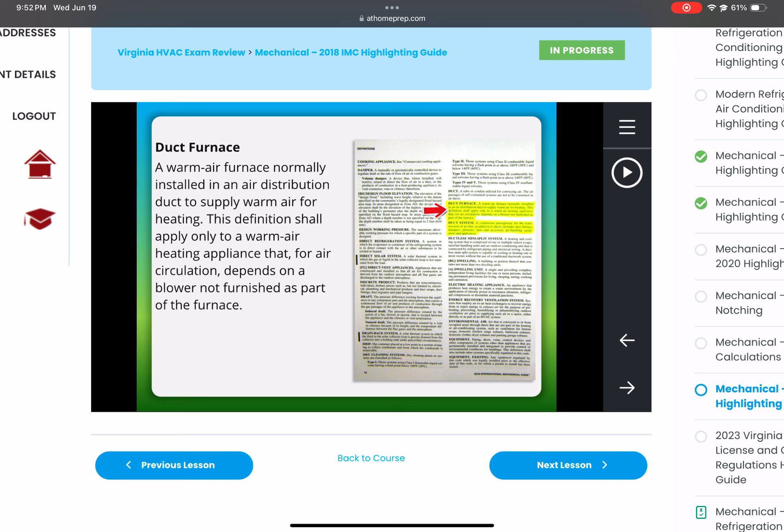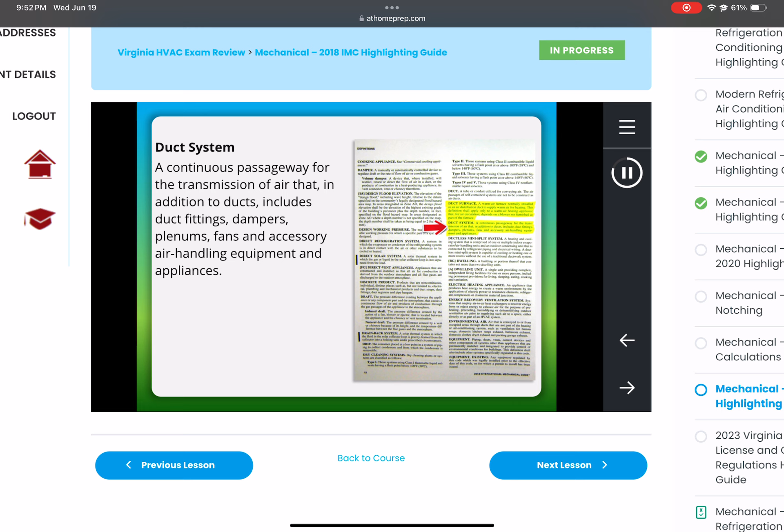Duct system. A continuous passageway for the transmission of air that, in addition to ducts, includes duct fittings, dampers, plenums, fans and accessory air handling equipment and appliances. Low-pressure hot water heating boiler. A boiler furnishing hot water at pressures not exceeding 160 psi and at temperatures not exceeding 250 degrees Fahrenheit.

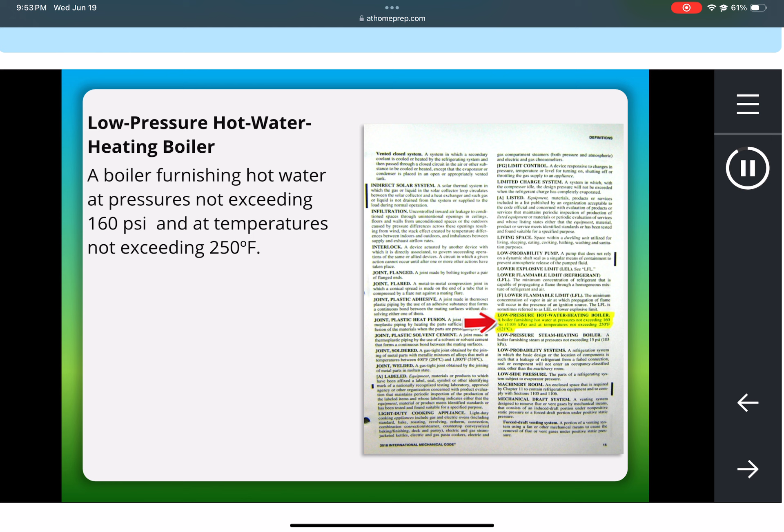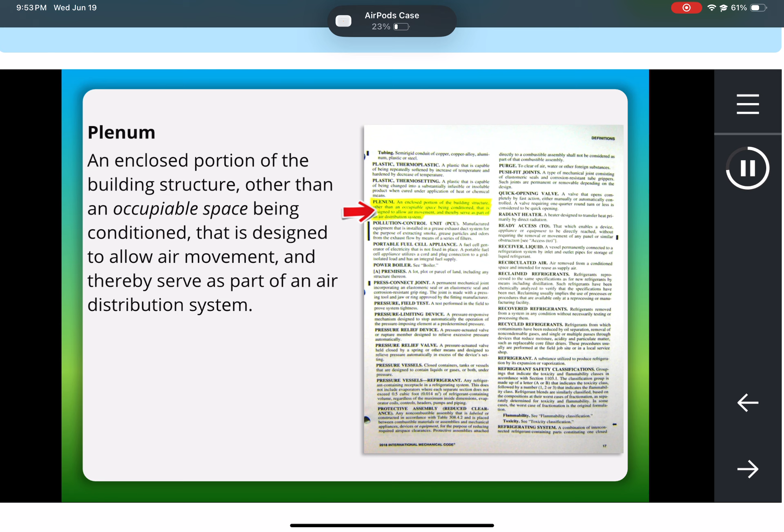Plenum. An enclosed portion of the building structure, other than an occupiable space being conditioned, that is designed to allow air movement, and thereby serve as part of an air distribution system.

Joist notching. Holes bored in joists shall not be within 2 inches of the top or bottom of the joist, and the diameter of any such hole shall not exceed 1/3 the depth of the joist. Notches in the top or bottom of joists shall not exceed 1/6 the depth, and shall not be located in the middle third of the span.

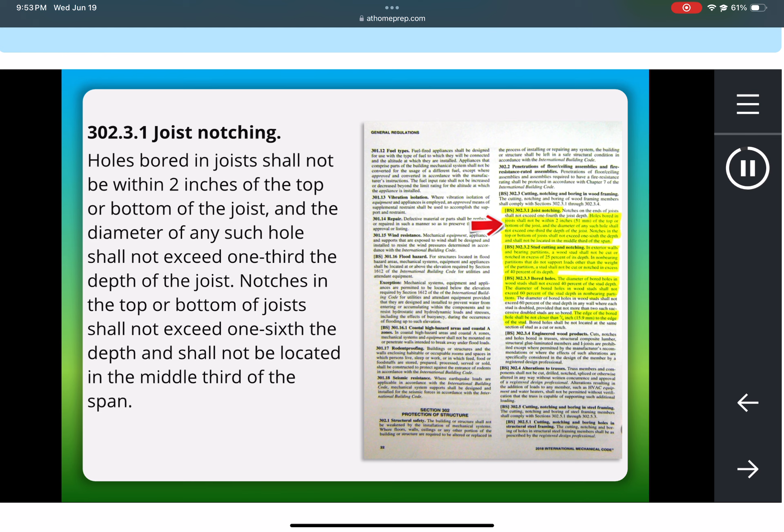Stud cutting and notching. In exterior walls and bearing partitions, any wood stud shall not be cut or notched in excess of 25% of its depth. In non-bearing partitions, that do not support loads other than the weight of the partition, a stud shall not be cut or notched in excess of 40% of its depth.

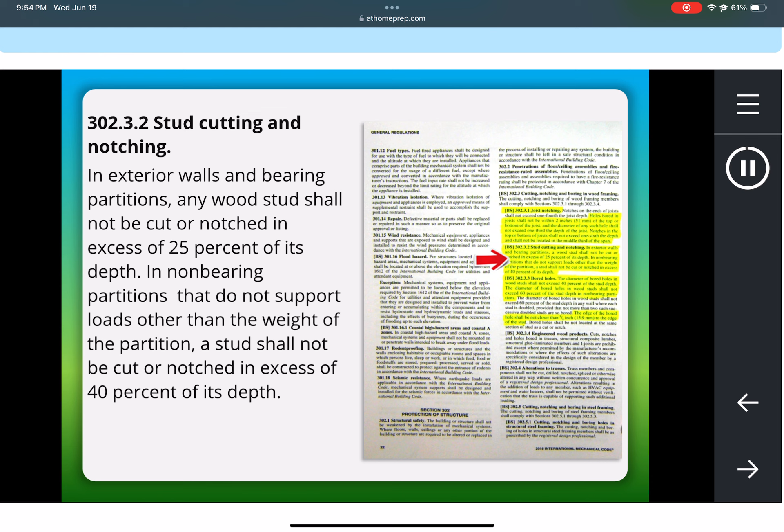Bored holes. The diameter of bored holes in wood stud shall not exceed 40% of the stud's depth. The diameter of bored holes in wood stud shall not exceed 60% of the stud depth in non-bearing partitions. The edge of the bored hole shall be not closer than 5/8 inch to the edge of the stud.

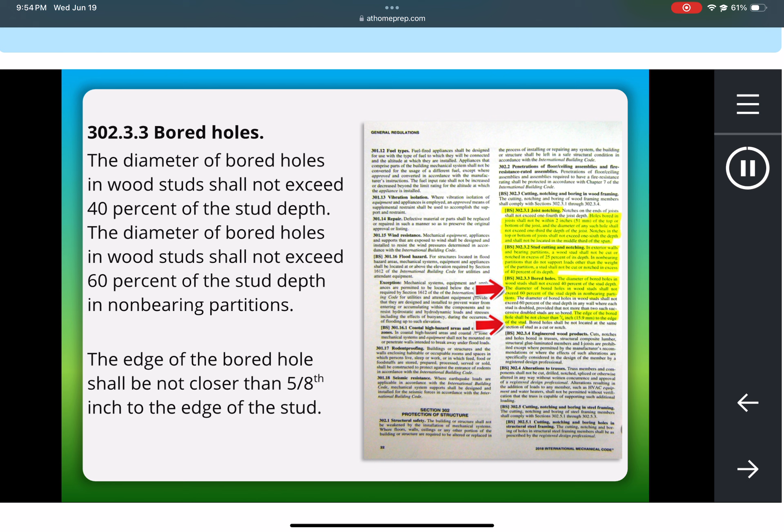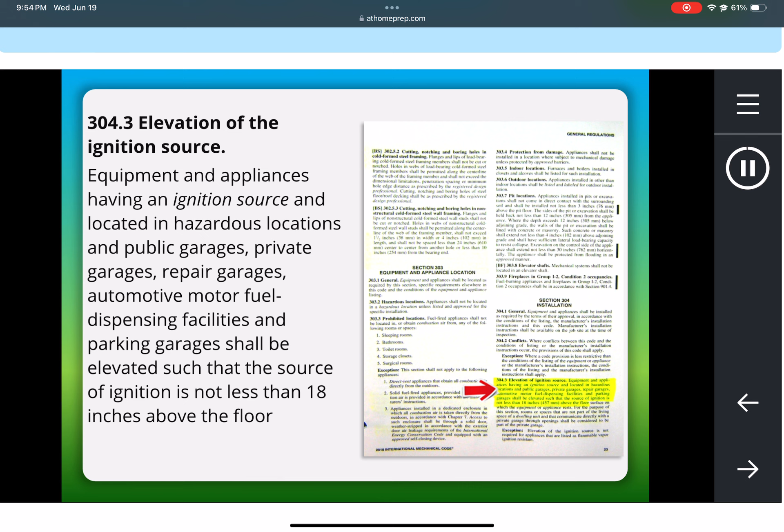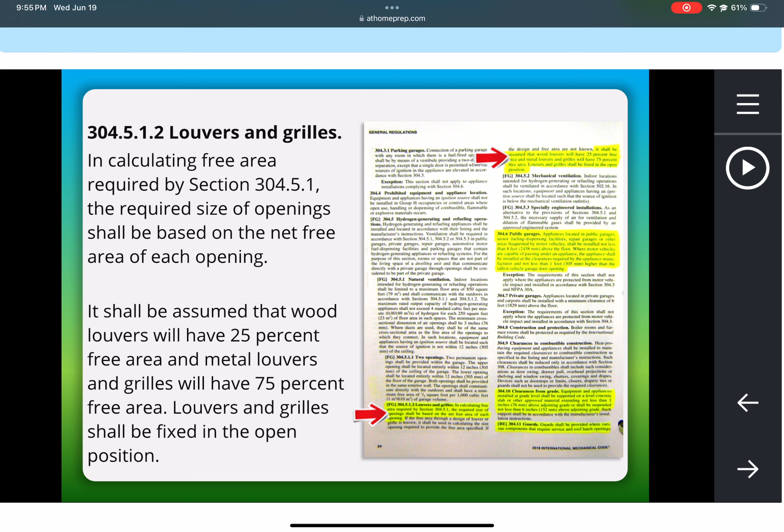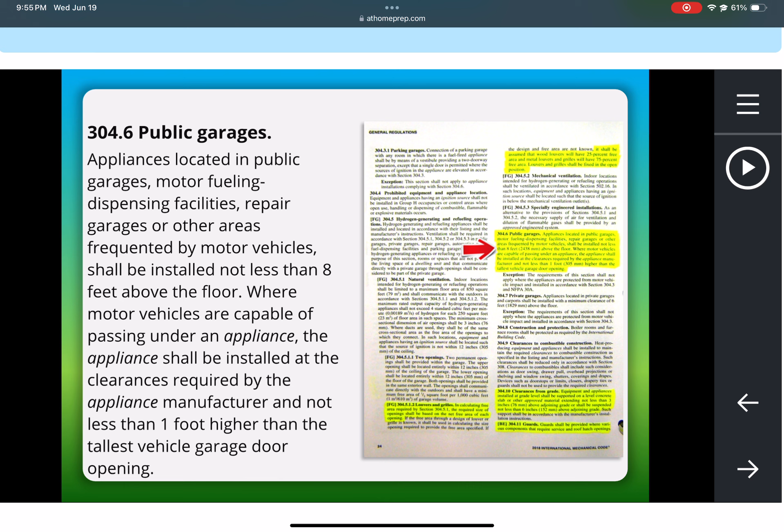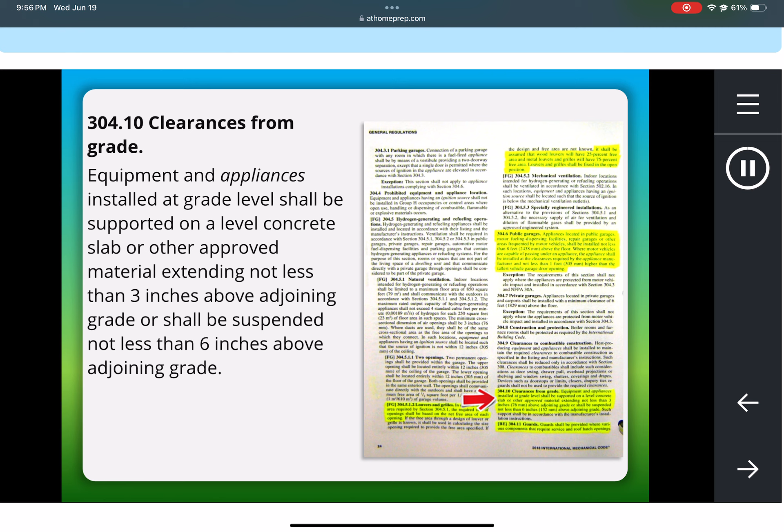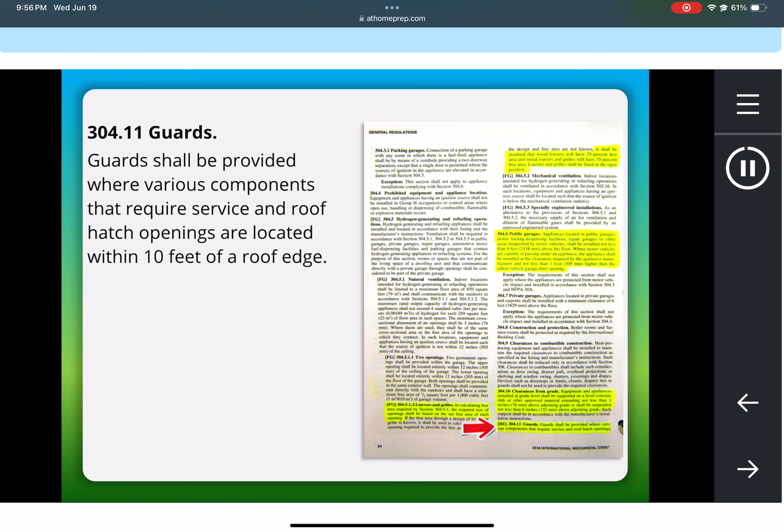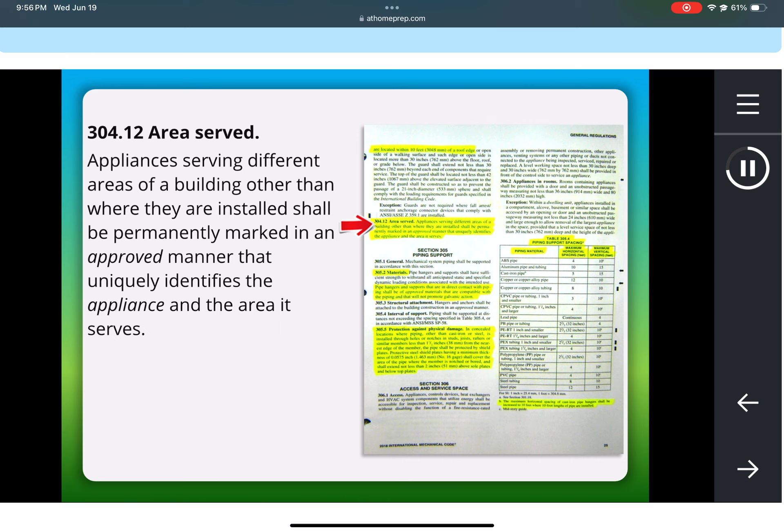Guards. Guards shall be provided where various components that require service and roof hatch openings are located within 10 feet of a roof edge. Area served. Appliances serving different areas of a building other than where they are installed shall be permanently marked in an approved manner that uniquely identifies the appliance and the area it serves.

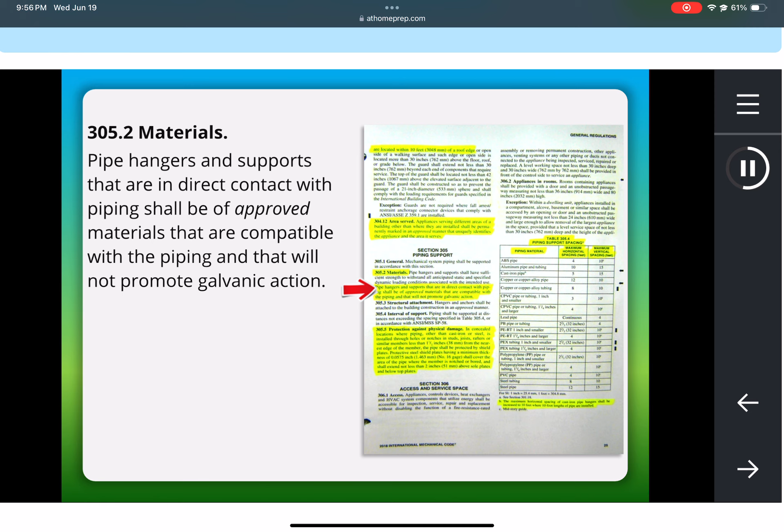Materials. Pipe hangers and supports that are in direct contact with piping shall be of approved materials that are compatible with the piping and that will not promote galvanic action.

Protection against physical damage. In concealed locations where piping, other than cast iron or steel, is installed through holes or notches in studs, joists, rafters or similar members less than 1 1/2 inches from the nearest edge of the member, the pipe shall be protected by shield plates. Protective steel shield plates having a minimum thickness of 0.0575 inch, number 16 gauge, shall cover the area of the pipe where the member is notched or bored, and shall extend not less than 2 inches above sole plates and below top plates.

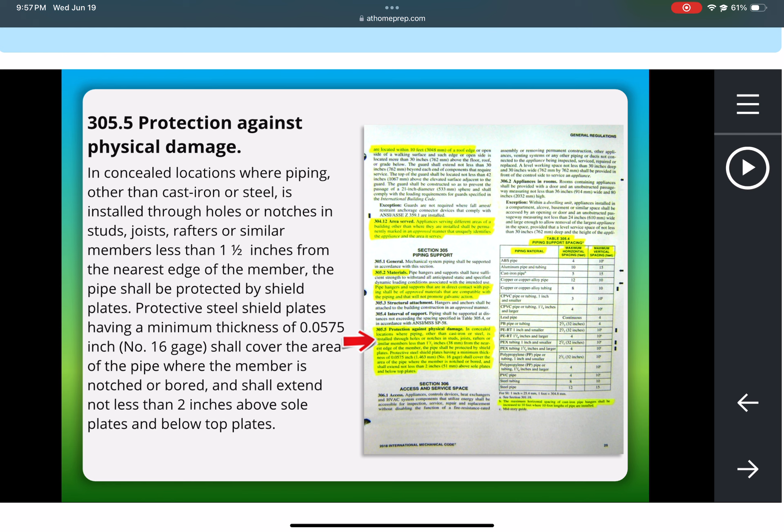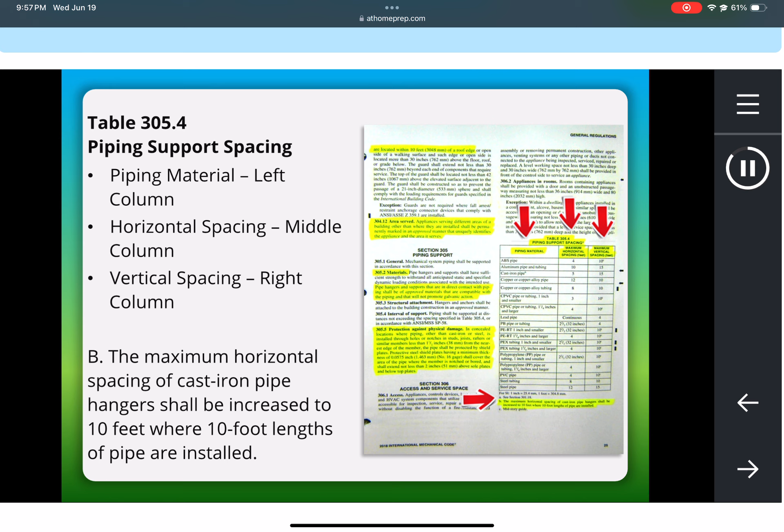Table 305.4, Piping support spacing. For this table, piping material is listed on the left, while the maximum horizontal spacing is in the middle column and the maximum vertical spacing is on the right. Pay close attention to Note B. Note B indicates that if cast iron pipe hangers are installed in 10-foot lengths, the maximum horizontal spacing between hangers can be increased to 10 feet.

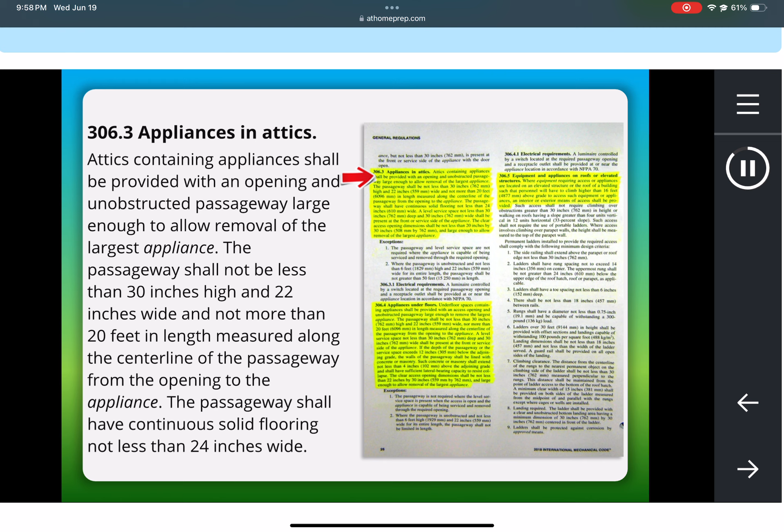Appliances in attics. Attics containing appliances shall be provided with an opening and unobstructed passageway large enough to allow removal of the largest appliance. The passageway shall not be less than 30 inches high and 22 inches wide and not more than 20 feet in length measured along the center line of the passageway from the opening to the appliance. The passageway shall have continuous solid flooring not less than 24 inches wide.

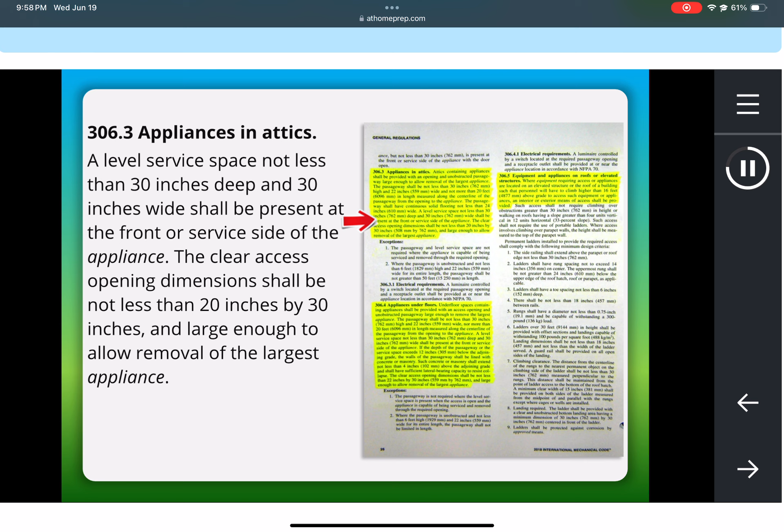A level service space not less than 30 inches deep and 30 inches wide shall be present at the front or service side of the appliance. The clear access opening dimensions shall be not less than 20 inches by 30 inches, and large enough to allow removal of the largest appliance.

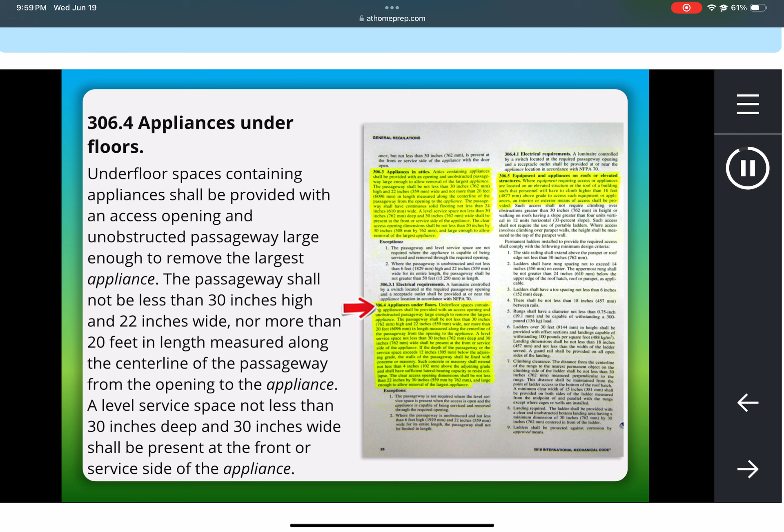Appliances under floors. Underfloor spaces containing appliances shall be provided with an access opening and unobstructed passageway large enough to remove the largest appliance. The passageway shall not be less than 30 inches high and 22 inches wide, nor more than 20 feet in length measured along the center line of the passageway from the opening to the appliance. A level service space not less than 30 inches deep and 30 inches wide shall be present at the front or service side of the appliance.

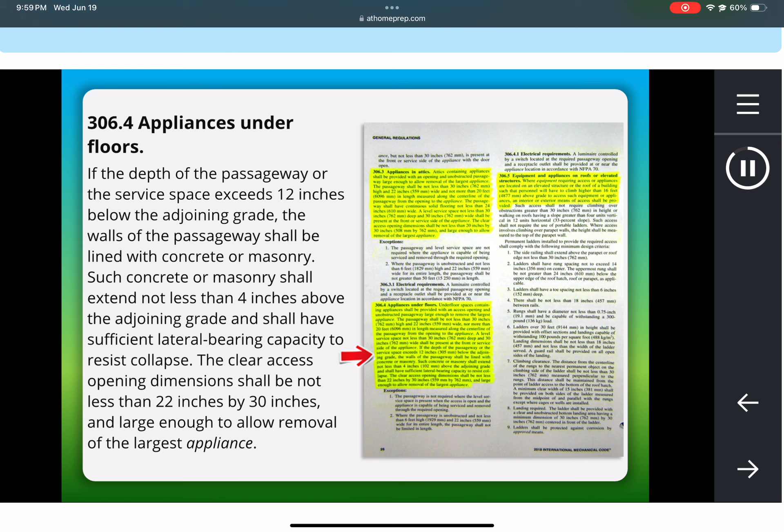If the depth of the passageway or the service space exceeds 12 inches below the adjoining grade, the walls of the passageway shall be lined with concrete or masonry. Such concrete or masonry shall extend not less than 4 inches above the adjoining grade, and shall have sufficient lateral bearing capacity to resist collapse. The clear access opening dimensions shall be not less than 22 inches by 30 inches, and large enough to allow removal of the largest appliance.

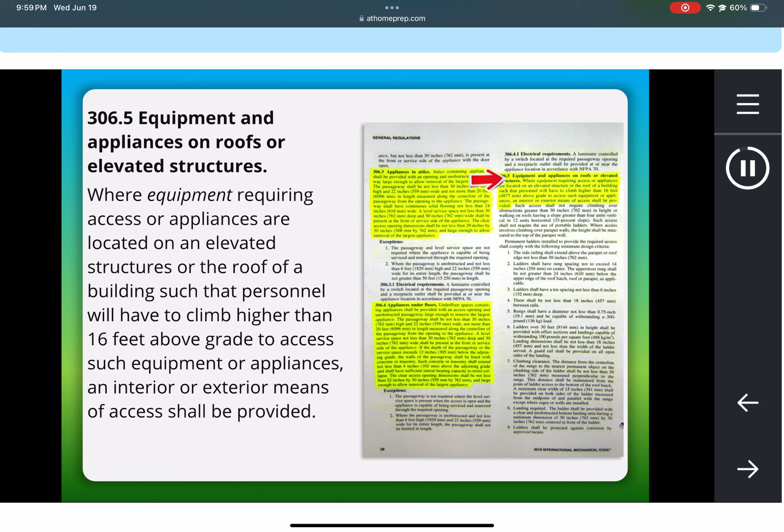Equipment and appliances on roofs or elevated structures. Where equipment requiring access or appliances are located on an elevated structure or the roof of a building such that personnel will have to climb higher than 16 feet above grade to access such equipment or appliances, an interior or exterior means of access shall be provided. Condensate disposal. Condensate shall not discharge into a street, alley or other areas so as to cause a nuisance.

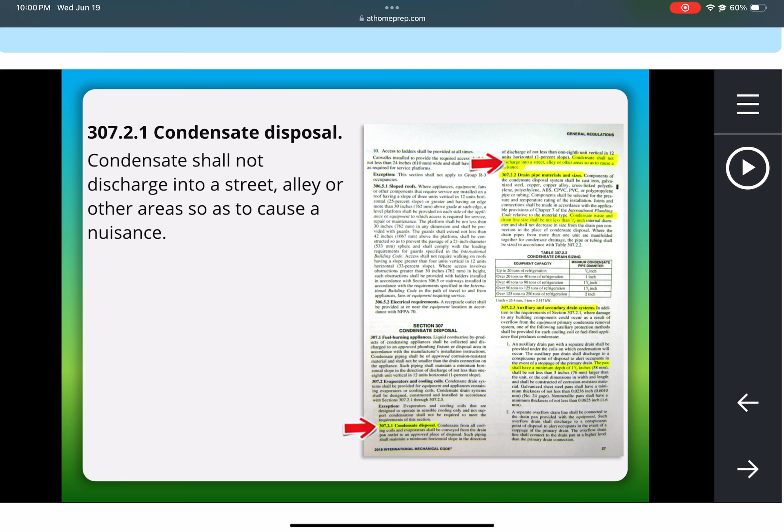Drain pipe materials and sizes. Condensate waste and drain line size shall be not less than 3/4 inch. Auxiliary and secondary drain systems. 1. The pan shall have a minimum depth of 1½ inches. Table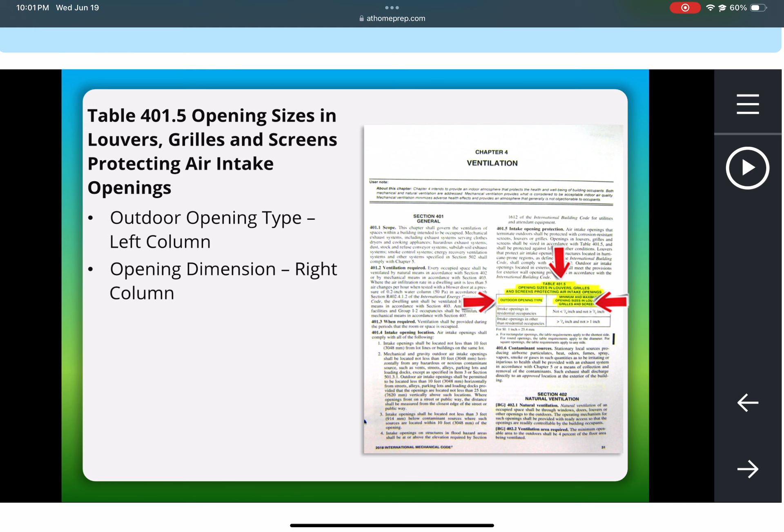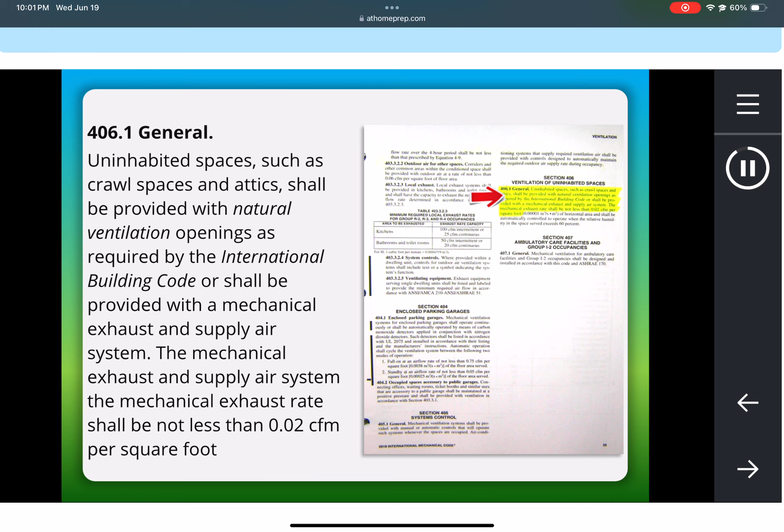Recirculation of air. 1. Ventilation air shall not be recirculated from one dwelling to another or to dissimilar occupancies. General. Uninhabited spaces, such as crawl spaces and attics, shall be provided with natural ventilation openings, as required by the International Building Code, or shall be provided with a mechanical exhaust and supply air system. The mechanical exhaust and supply air system. The mechanical exhaust rate shall be not less than 0.02 CFM per square foot. Table

403.3.1.1 Minimum ventilation rates. This table has been completely rewritten for the 2018 Code. Please note that this is a large table that spans several pages. The first column indicates the occupancy classification. The second column indicates the number of people that you will have, or default occupancy density. Please note that the table is based on 1,000 square feet. You can find the people outdoor airflow rate in the breathing zone, which is based on the CFM per person, by referencing the third column.

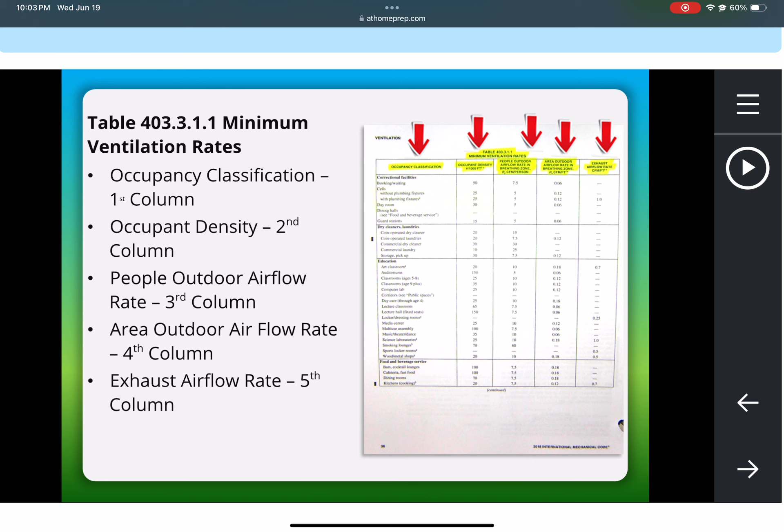The fourth column indicates the area outdoor airflow rate in the breathing zone, which is based on the CFM per square foot. If you need to find the total ventilation, you will first calculate your people outdoor airflow, and add it to your area outdoor airflow. Finally, the exhaust airflow rate is indicated on the fifth column. Exhaust installation. Clothes dryer exhaust ducts shall not be connected to a vent connector, vent or chimney.

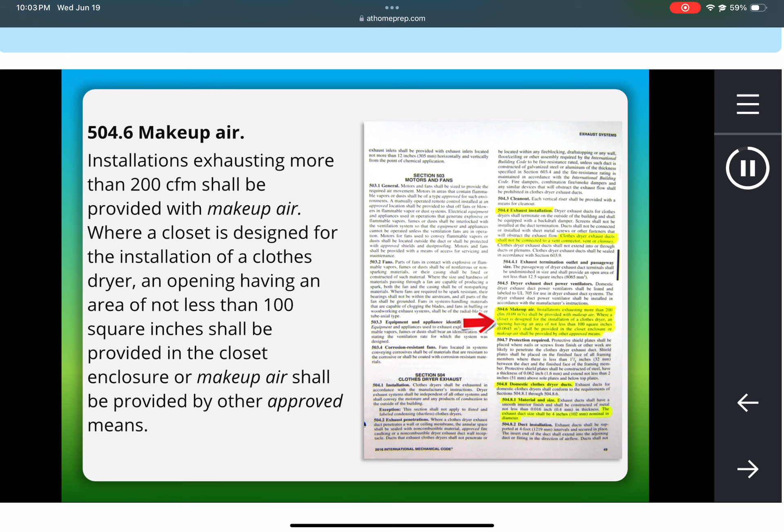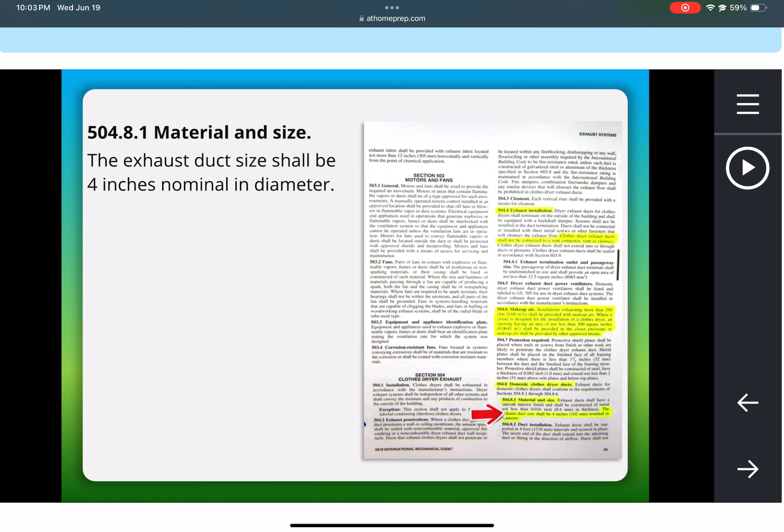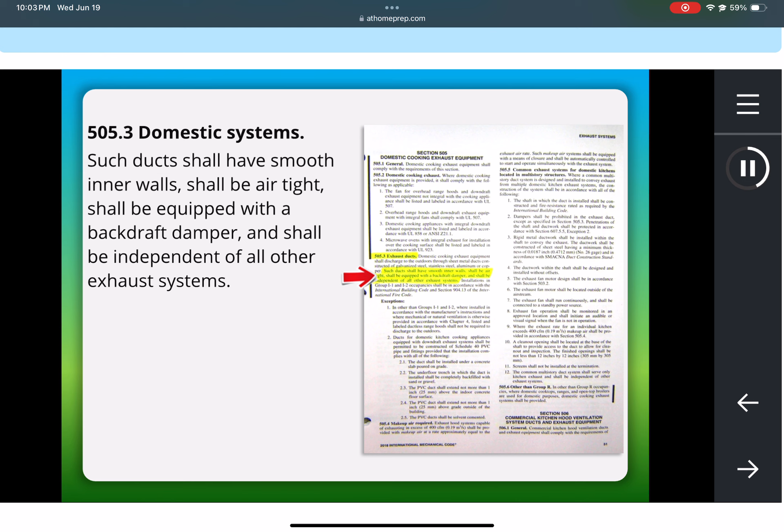Makeup air. Installations exhausting more than 200 CFM shall be provided with makeup air. Where a closet is designed for the installation of a clothes dryer, an opening having an area of not less than 100 square inches shall be provided in the closet enclosure, or makeup air shall be provided by other approved means. Domestic clothes dryer ducts. Highlight the heading. Material and size. The exhaust duct size shall be 4 inches nominal in diameter. Domestic systems. Such ducts shall have smooth inner walls, shall be airtight, shall be equipped with a backdraft damper. Material and size.